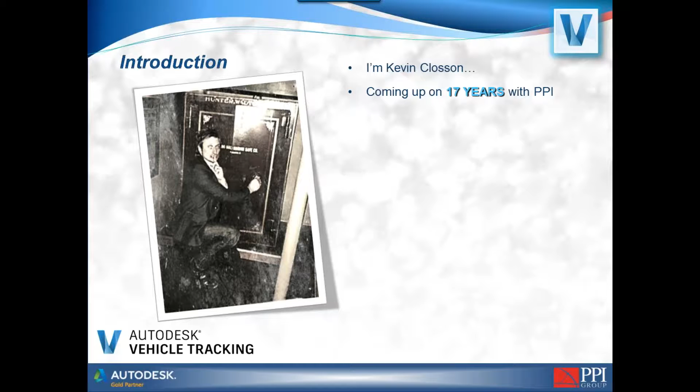Again, I'm Kevin Closson, and this part freaks me out a little bit - come September it will be my 17th year here at PPI Group. And I started when I was 10, you know. Well, I was going to say, I didn't think you were that old. Yeah, that's me, and by the way, that's a picture of when Wendy and I were in Chicago learning all this fancy new 2017 software.

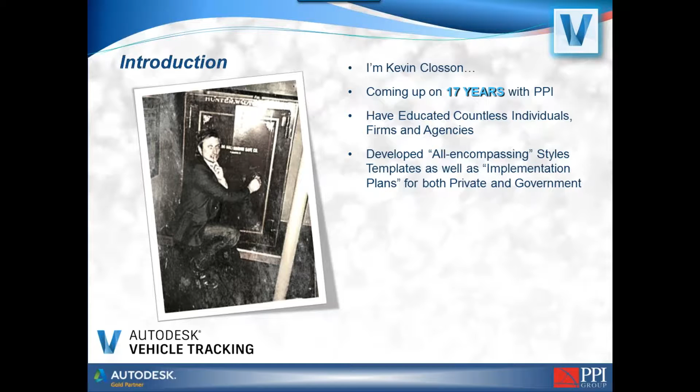I've been out there quite a bit, traveling all the time. My role has changed quite a few times throughout the years. I do a little bit of tech support here and there, a lot of the training, a bulk of the custom training. My focus now is more on going in, taking a look at people's processes, figuring out how we can streamline the template for them, and just make Civil 3D work better for them, more efficient and so forth.

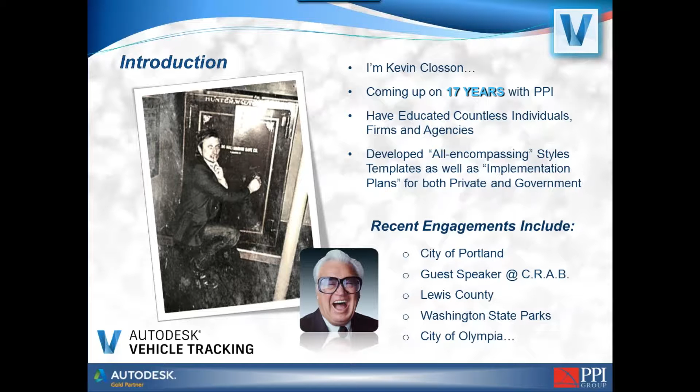In fact, I just came back from Olympia, so I heard a couple of the folks up there were going to be watching, so I can't see you, honestly, but I hope you're doing well, and I have a chat with them a little bit later. And this is for absolutely no reason, I just like Harry Caray, and I love the picture.

And then hopefully one way or another we'll try to squeeze out a little bit of fun out of this. For me, I do these little things for me - I should have had like a little contest, tell everybody to remember the names, movies, right, things like that. We could have got the most, we could have had a prize and everything. Well, we could start now - I got a ton of prizes.

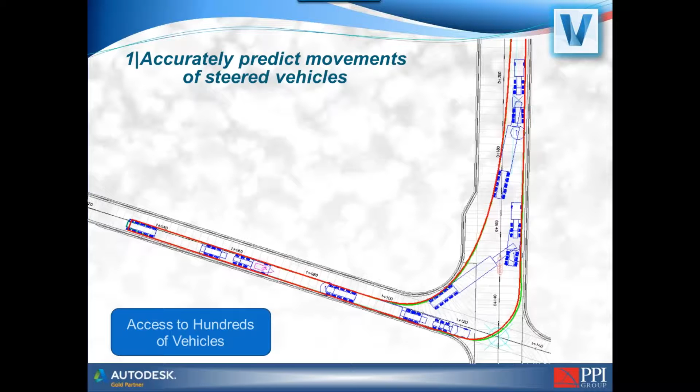Speaking of predicting vehicle movements, once you install the program, I believe it's roughly 1,500 different vehicles that come with it. You also have access, depending on your contract with Autodesk, to roughly 600 more vehicles that you can download and install onto the system as well.

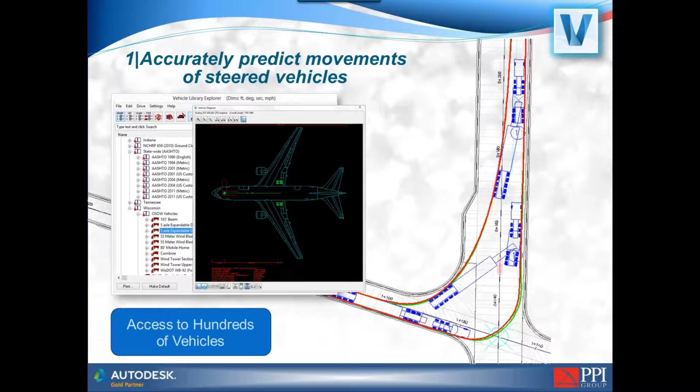Taking a quick peek here, you can see this is a Boeing, 747 or 737, whatever it is. Then a little tough to see due to the color, but there's a semi. You can view these in different views - darn near any vehicle you can possibly think of, light rail, everything is in this thing.

The beauty of it here - and if my friends up north are seeing this, this is one that was given to me a while back - this is just a cut sheet. You can customize anything you want. It's very, very easy to customize, and I actually added a little bit more just to show that off.

Due to its size you can see it a little better here, but you can see all my chicken scratch on there - I have to find the wheelbase and different measurements. There are no actual standards to this, so just to forewarn you, if you download a sheet from wherever it's at, usually from a vendor selling the vehicle, they'll have all these specs, and you'll probably have to do some simple math to boil it down.

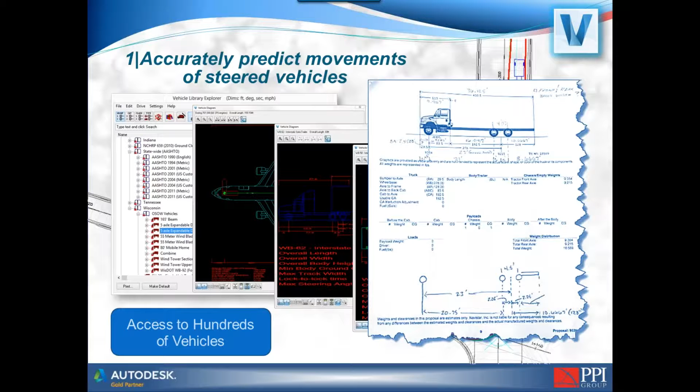But I added this one in here just to give you a feel for it. So if I were to take this one, the program comes with a wizard that allows you to - well for starters, you'd actually go find something that's relatively close. Once you've found something close, you can pull it up in the wizard, or you can even start from scratch. I usually try to find something close.

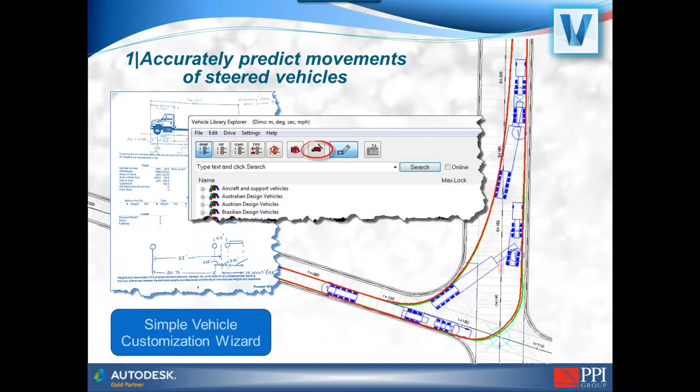It'll bounce you through - you can see this is one of many, there's a button right here that says next. Once you've set the wheelbase or whatever it is, your axles and so on, it just keeps jumping you through one after another.

Last week, when I was working with some folks up north, we had a very simple sheet - I think there were only 4 settings, so that's all there was. But on these more complex ones that have vehicle heights, mirrors, multiple hinge points, anything you can think of, all of that can be brought in and easily customized.

In a nutshell, what you basically do - hopefully you can see my cursor - it starts off with a library. It comes with an extensive library, as I said roughly 1,500 vehicles. You would find something close. Underneath that, there's what we call groups, which is just a grouping of vehicles. Then you have the actual vehicles themselves, and from there, each vehicle's individual spec.

I say all that, and I know you're not seeing it here, but I say it because this can then be saved in that drawing - it'll always remain in that drawing. So if I were to send this to somebody, they'd see it.

But if you did take the time and go through the process of customizing these vehicles, you can save that information back into your own group or library. The idea is, right out of the box, you cannot adjust the actual vehicles that come with it. Those are standard - you don't touch them because you don't want to mess anything up. So you grab one, you copy it, then you start that wizard.

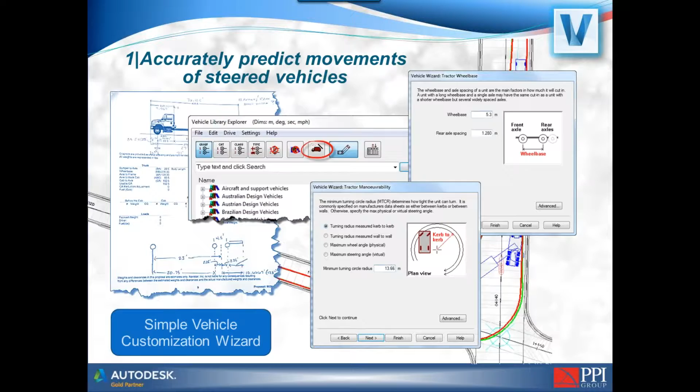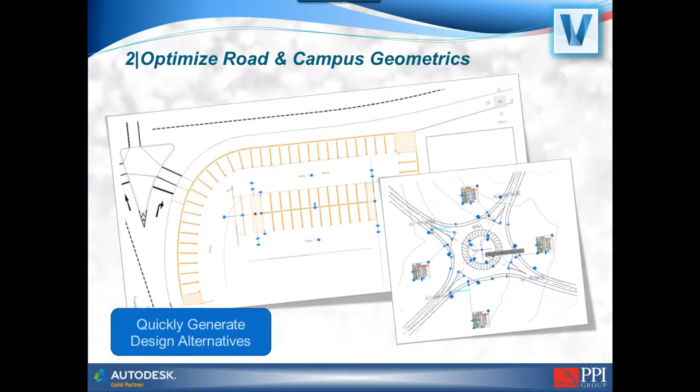Of course, all of those standards can be copied and customized to your exact needs. And on top of that, you can perform real-time analysis both in 2D and in 3D.

Once you lay that information in, we'll see here in a little bit - the vehicle draws, you can see the chassis, you can see the wheelbase, the envelope of the vehicle itself, how it's making it around corners. So that would be in 2D.

Then you can even run a three-dimensional evaluation to see if you're making it through an intersection, or if you're running a low boy or something like that - is it going to be accidentally milling the system or milling the road, working against you?

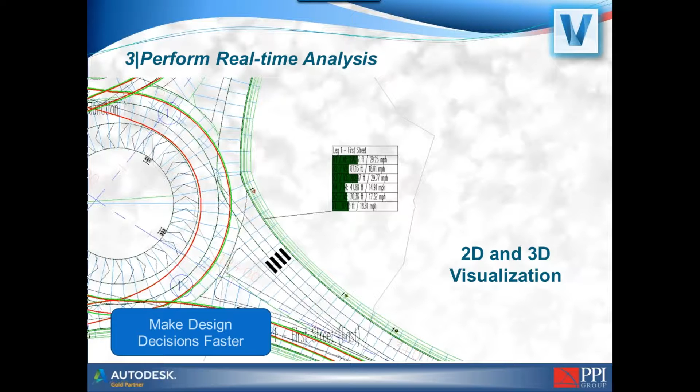And the other thing you can see up there, that's a roundabout. On the right there - I'll throw something together so you can see how easy it is to create these things - that's what they call a HUD, that little chart. We're getting real-time analysis where I start moving things around, and we'll see it here in a little bit, where it'll show different colors if you're staying within guidelines and meeting certain design standards.

So anywho, let's get weird here. We're going to start off - a big part of this presentation, where it originated, was we wanted to show different uses for vehicle tracking. It's not just the standard, let's drive a car, let's see if we can get this truck around the corner. Obviously that's what a bulk of our work will be, but there's a ton of different uses out there.

In fact, Wendy and I, when we were back east, we were seeing all of these neat workflows, and it excited us - we thought it was slick. So we wanted to show some of this stuff off. I have three different ones here. I may talk about a little bit more, and if anybody has questions on any of them, feel free.

But the first one we'll be looking at is like a forklift. Next one will be an airport with a baggage claim. And then a hospital - and I forgot, I left that in there. Sorry, Wendy, goofing off - it's your little scooter there.

You promised you wouldn't tell anybody about my little scooter. Well, it's very cool - she's got flames on it and everything else.

It's very nice. And in that hospital also, we'll take a look at what's referred to as a gurney - I'll show that off here in just a second.

So starting this thing up here, we're starting off by looking at this forklift, and right there is the library - it's kind of small, but the vehicle that was selected was an interstate semi, very similar to AutoTurn. You just start drawing this in and proceed, and there's some great tools built into this where you can see where they're starting to make that turnout, and what I just selected there was pick alignment.

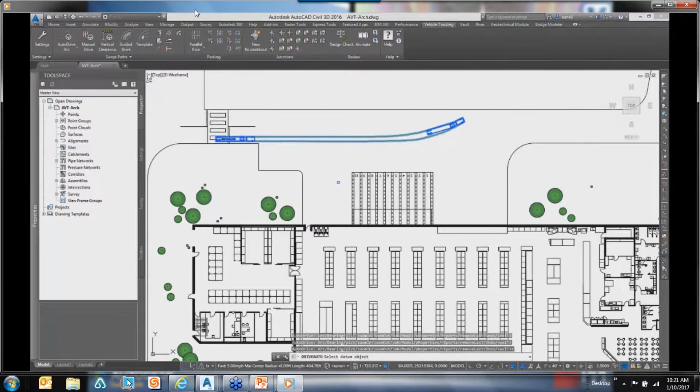I can select that line, and what that's going to do is orient it to any line. Even though it says alignment, it's not truthfully a true alignment - it could be a polyline, a box, whatever it may be. And you can see where that's backing up. That's sort of the traditional vehicle use that everybody, for the most part, uses - the 2D.

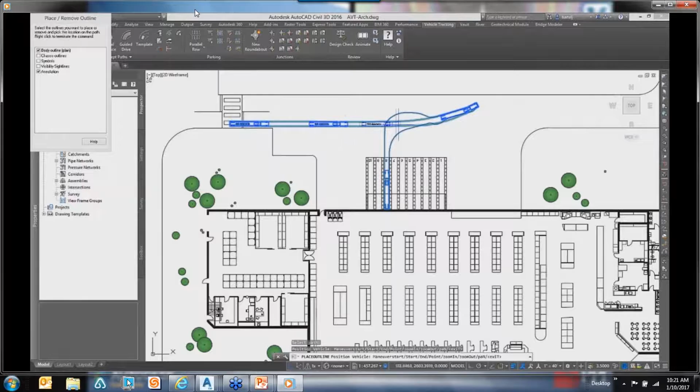Now what's going on here is called placing an outline, so you can further recognize this. And that just draws that vehicle in a still shot there.

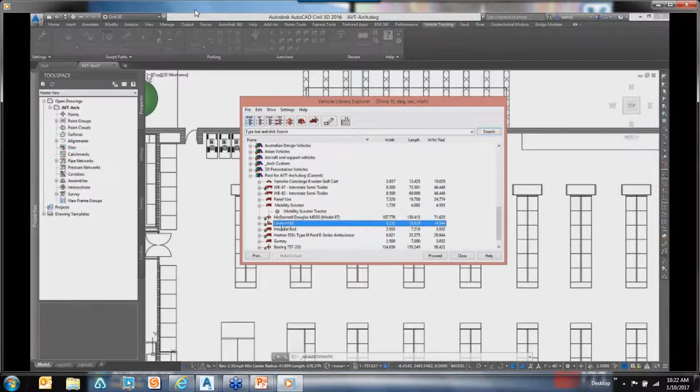Very nice. Now we're going to go inside the building, and I may speed up some of this so I don't bore you to tears. The next move is actually going out and grabbing a forklift. These forklifts, just like any other vehicle in this program, you can take and change its turning radius, make it yours basically. Just get the specs, find something relatively close, and we can go right in and change that up. So I'm going to place that inside the building, and I'm proceeding here.

I've just started with orienting the forklift, and you can see where I can slide this up and down, using a 90-degree angle there. That would be going into the truck. Again, picking an alignment so it'll orient to that line as it's backing up. This could be something like a Costco or some kind of warehouse. Will we be able to make it around that corner? Notice again, I'm just picking alignments, so this makes it so much easier. Now, by the way, I could be just drawing this freehand.

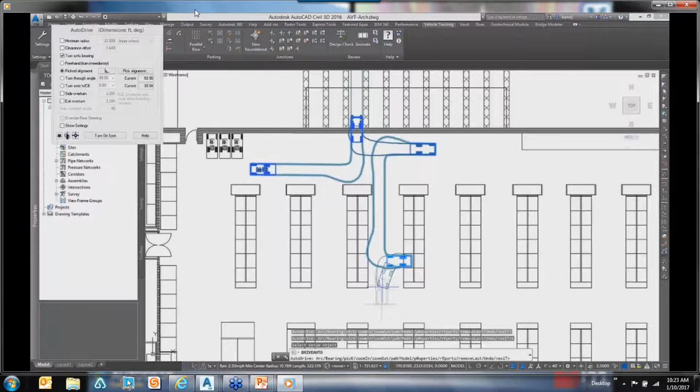It does get a little sketchy when you try to do that. No, it doesn't—it's supposed to be like that. It's just there's a lot of picks and clicks, and you can accidentally mess things up, and I'll show you here in a little bit.

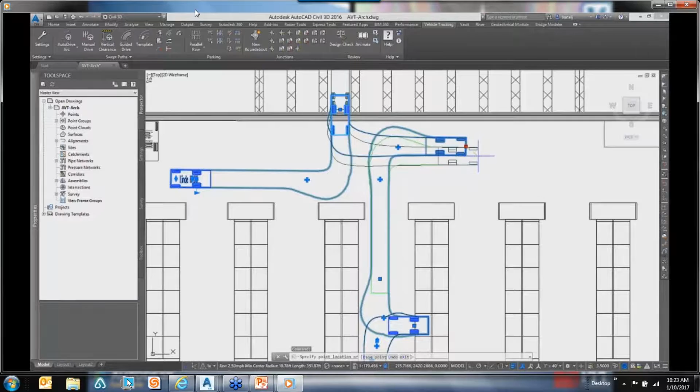So there, the whole concept is I'm just working with these extra little grips. I can grab these, move it around. You can see where we're looking at the envelope there, exactly what's happening. Just further refining, making sure that this vehicle can make all of these turns, and it looks like we're in pretty good shape. Then I could return back.

Now that is of course real-time 2D that we've been discussing. This is actually playing it, and I'm just dragging the little bar in the upper left-hand corner, or I can just hit play and it'll draw, or we can watch that vehicle make its path.

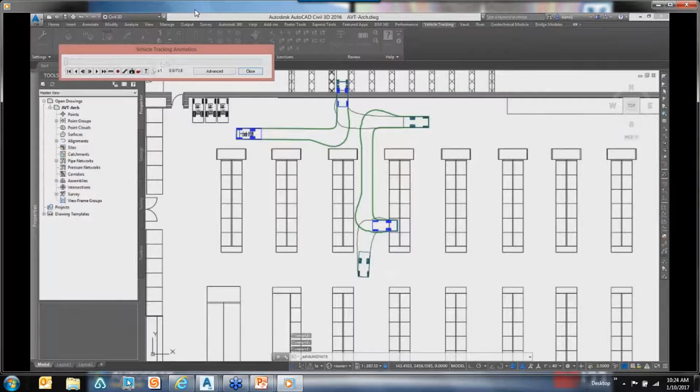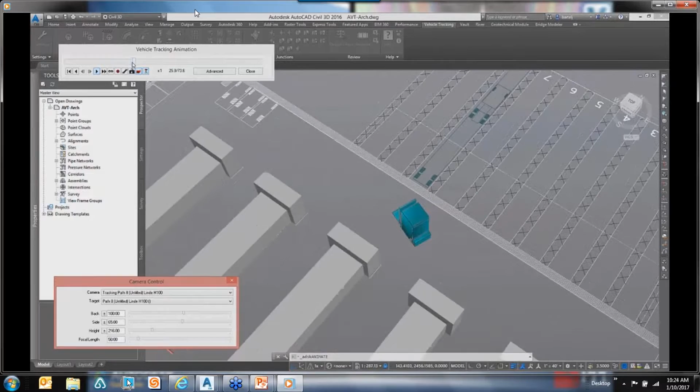Now this would be in 3D, and I spoke to a few of you personally on this. This is not magic by any means. Every time you see something like this, it has that feeling like, oh goodness, how hard is this to pull off? It's not hard at all. This same command—all we did was animate, and we threw it into a quick orbit there, so we can see it in 3D.

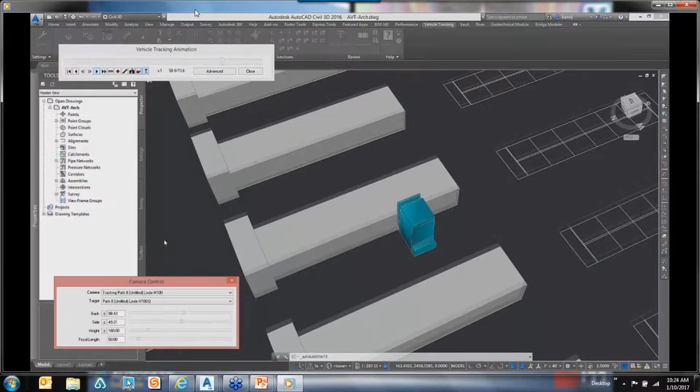And then all of those possible shelves or buildings or whatever it is, that's just a simple extrude command. Just type extrude, grab the closed polygon there, and drag it up to whatever height you need. This can also be on a road if we wanted it to, obviously, or this is just at a 0 elevation, or for that matter, whatever your elevation is. All right.

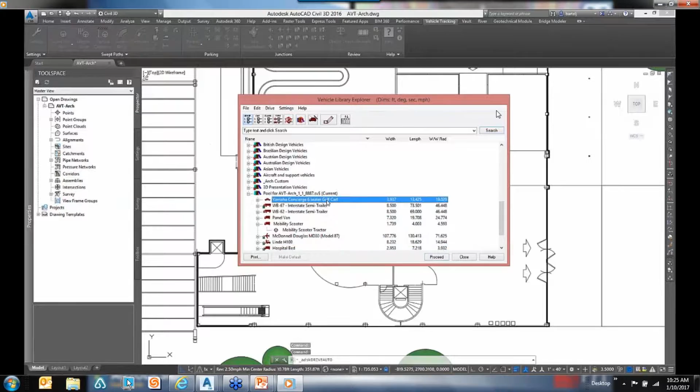Then the next one we're going to take a look at, again giving you a little bit of an outside-the-box concept here. So this one is at the airport, and over here what we're looking at is the staging area. I'm selecting a golf cart—it's a 6-person golf cart. I'm going to put it in its staging area there. This would be picking up folks that maybe aren't getting around so well at the airport.

So as they come off the plane there, we're backing up, and the whole idea is I want to see if I can get to—we're leaving customs there, and I'm trying to get to the baggage area. Can I make these turns? I'm going to try to loop around this thing.

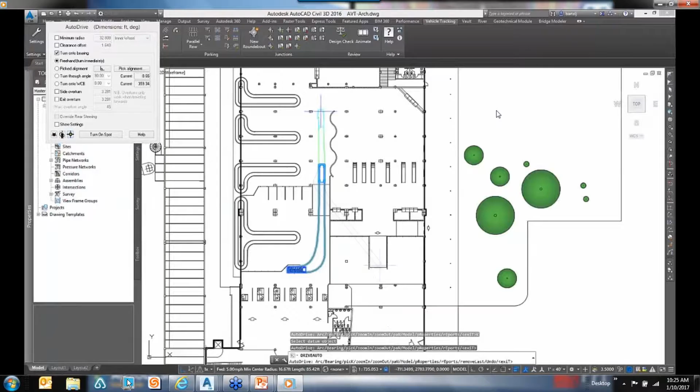Right now I'm drawing this manually. See how that's got that, as I get around there. For those of you that have dabbled with this, you know it can get a little tricky. That would be just working its way through. If I don't like it, I can keep backing up, and again, that's that real-time analysis there.

From here, we can pick another alignment. See if we can squeeze through, and we're trying to work our way out to the exit.

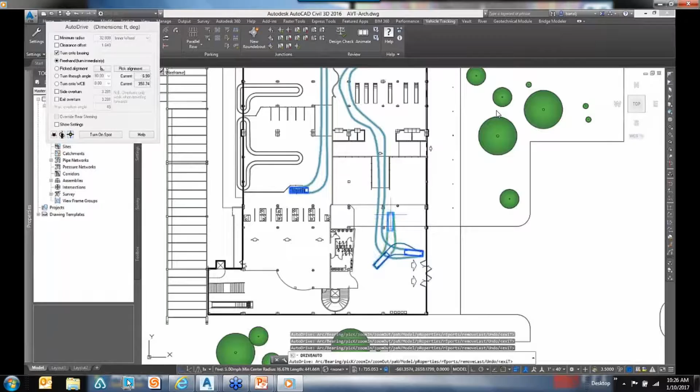And then that would be the drop off to the exit, and they could back up and get back into that staging area. So this has helped out a lot of folks on the architectural side, obviously, where are their designs going to work? Is the equipment that they're putting inside the buildings placed correctly?

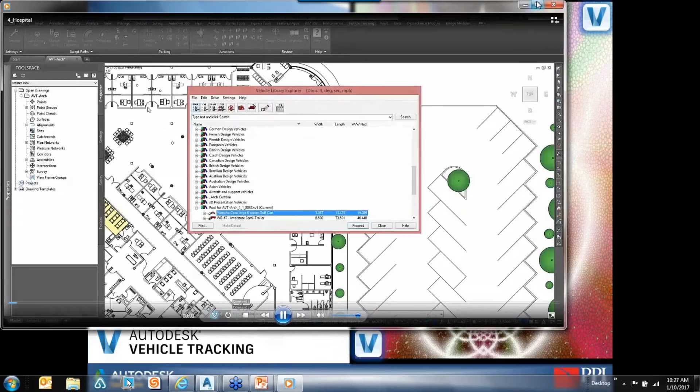And the one I really like is this hospital one. I thought this was kind of slick. Starting off with this, this is the mobility scooter, and this is just one of the scooters that comes with the program. Again, you can customize it to whatever your needs are. This would be if a visitor came to the hospital and needed to get down to any one of the doctor's offices, working their way through.

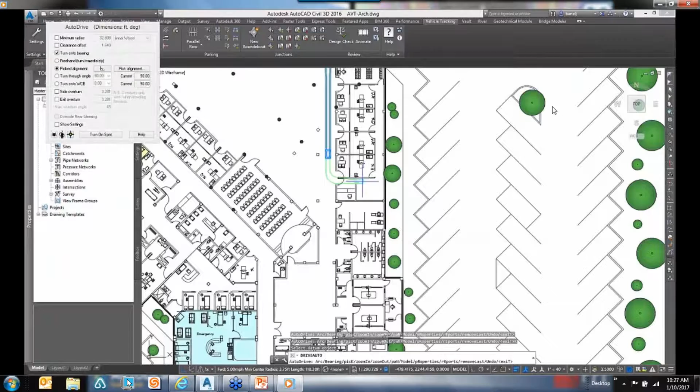Just picking another alignment here, taking it around that corner. Now coming from the west, you can see where it makes that corner, there's plenty of room, so getting into any of those buildings wouldn't be a problem. But once we got around on the east side, if we were trying to turn into one of these buildings, that's where it's going to get pretty tight. So we'd have to figure out a possible alternate design at that stage.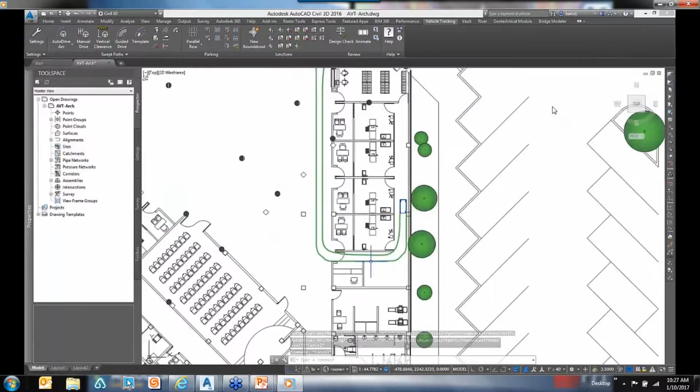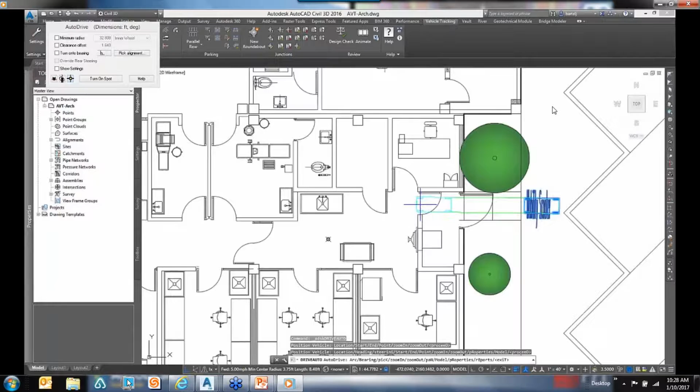Going down to the south end of this building, I'm going to do the same thing, drawing using that same scooter. In this case, this is from a west access, and this might be one of the employees. Same idea, you just proceed along - zooming in here a bit. We're getting by that wall, kind of squeeze around the corner there. Just following these alignments, and then right out through the door there. So that wouldn't be a problem, that shows we'd be in pretty good shape.

So down here, we're looking at an ambulance, and of course it would start with a vehicle. When the ambulance pulls up, can it make all those turns? Yeah, check, we're good there.

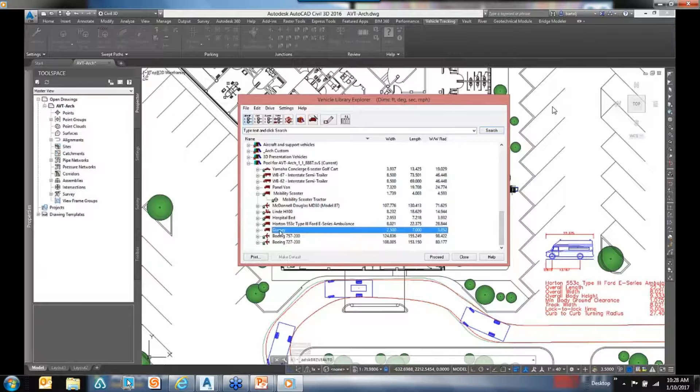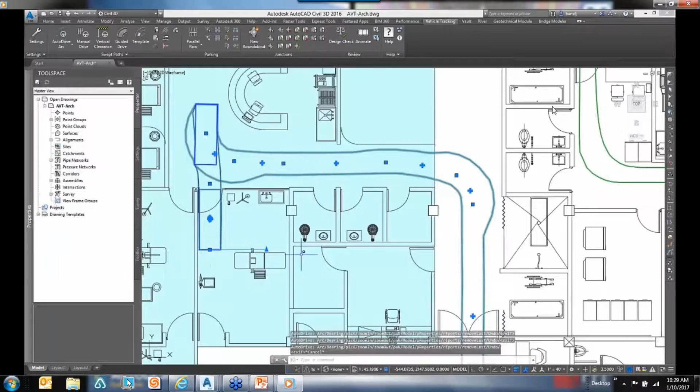And then notice there's a hospital bed, here's the gurney, and once you place it, you orient it. So this would be coming out of that ambulance bay, and where we're trying to go is to the emergency room possibly. So it's not too bad, kind of tight going around that corner, but here's where it gets a little sketchy. It looks like it's making it, but it is tight. So we can get it in there now, if all works out - or I'd say that we'd be okay on that.

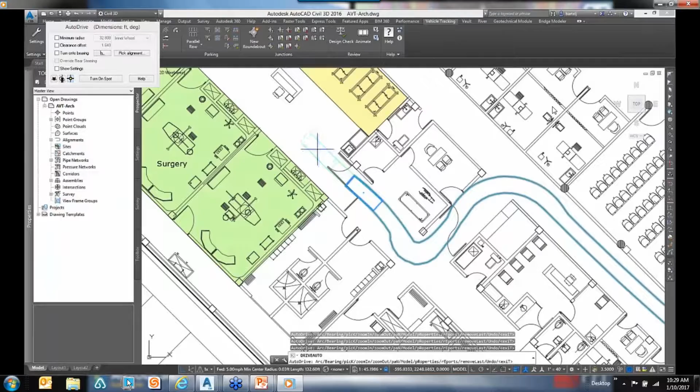Now up here, we're going to be looking at if we needed to get to the surgery room. So coming from that same location and working our way around the corner, trying to get into one of these surgery rooms, and that's real tight there. And trying to line that up against one of the beds, so that's pretty tight. I hope we're not in a hurry.

Well, it depends, it depends. I hope it's not me on the gurney. No, I'm on the scooter. I'd be smashing into walls if you're on it.

So just different ideas. Now, I shared this last week with a few folks, if they happen to be listening.

One of my favorite ones I saw was back east when they were showing these new tools off for us. My favorite was the great big - what do they call those, like the Titanic, the great big ships - I can't think of the name. Cruise ships, cruise ship. So these things are getting bigger and bigger. Where they take off out of Florida, they're getting so large they can't get these things turned around. As it's coming into these docking locations, they have a lot of different boats and tugs to get these things oriented. Can it make the big turns? That was probably one of the neater out-of-the-box uses for this program that I've seen.

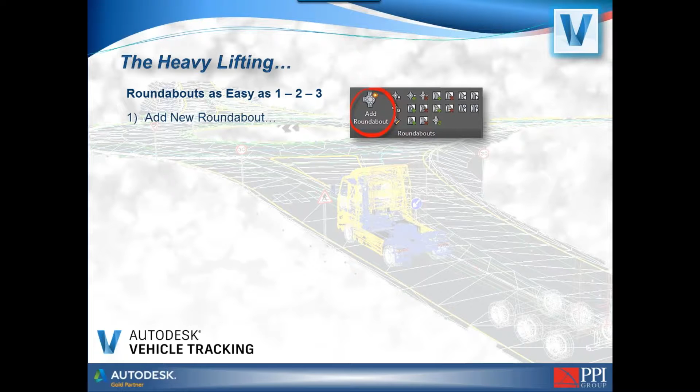Surely not hard, but as it gets laid in, it uses true design standards. So you're not just drawing lines, arcs, and circles. Now, is it what you need? Well, it'll probably be close.

When we were at the CRAB conference, we talked to quite a few folks on this subject matter, and you know where it'll get you to as far as just laying this in. I'll throw it in, and you'll see it here in just a second. But it's amazing how quick and how much of the design you can get done almost immediately. And as far as a corridor being created, from there we're still going to have to go through and make edits and all of that. But just that initial layout is mind-boggling how much faster it is.

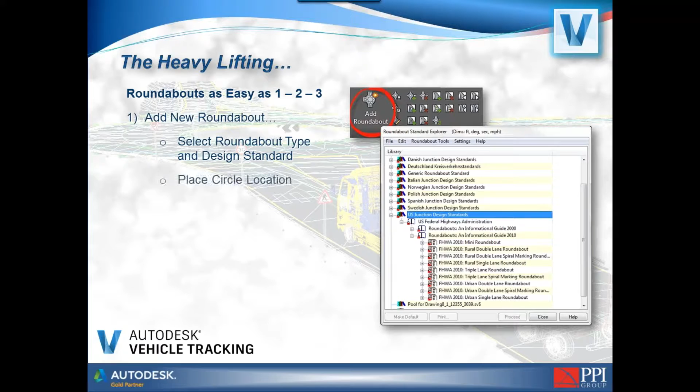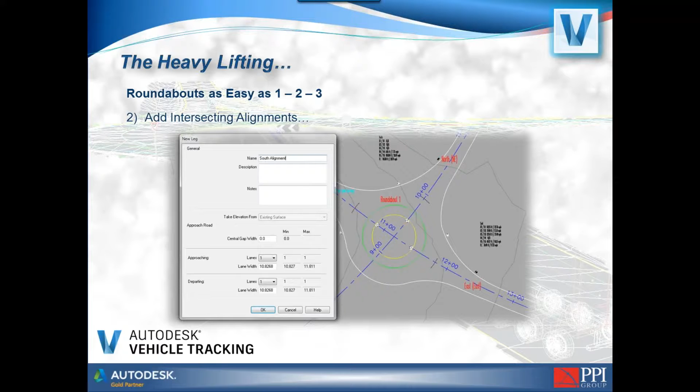So the process is kind of jumping you through the steps, and I'll show you here in just a second. You add a new roundabout, you select your design standard - what is it - and you place your location, which is often referred to as a circle location. Then the second part is you add in your intersecting alignments, or what are often referred to as legs. You can see in this one I created 3 of them up to that point. Everything again is adhering to standards there. And then the final part is the edit and refine stage.

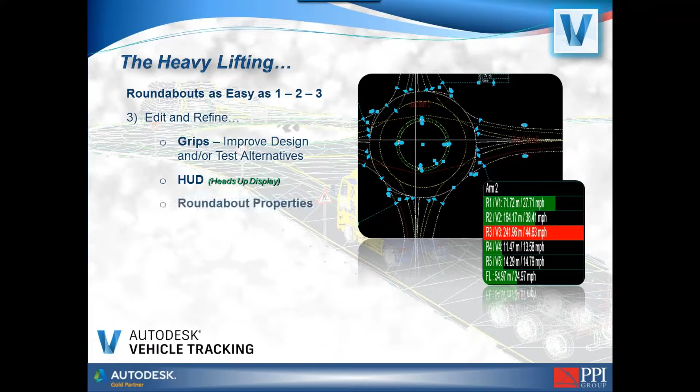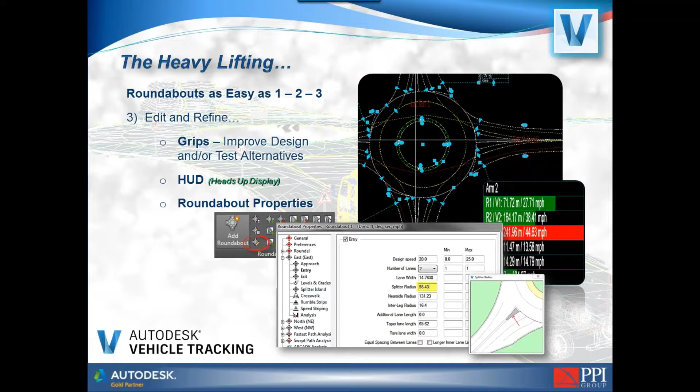And then after it's all said and done, probably one of the better parts of this is you can actually go into the properties of this, and it has an excellent interface that allows you to bounce back and forth and clean everything up right there. You'll see that - I'll show it in just a moment here. So in fact, let's bounce out to it.

All right, so what we're looking at here is just a couple of alignments. This is real simple - this is just a drawing from Autodesk, and there's not a lot to it. A couple of different alignments here. For those of you that have been using the program, or for those of you that are inexperienced with it, just remember everything comes down to setting up something first, like selecting a standard or selecting a vehicle, and then you perform whatever task needs to be done.

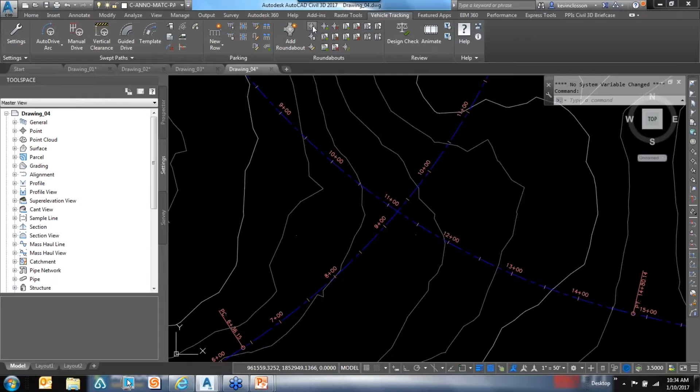In this case, I'm going to go into the Roundabout standard. It's like a library or explorer here. This may be a rural single lane roundabout. Just looking at these, I'll give you a second to poke through them. Okay, there's double lanes, all kinds of stuff.

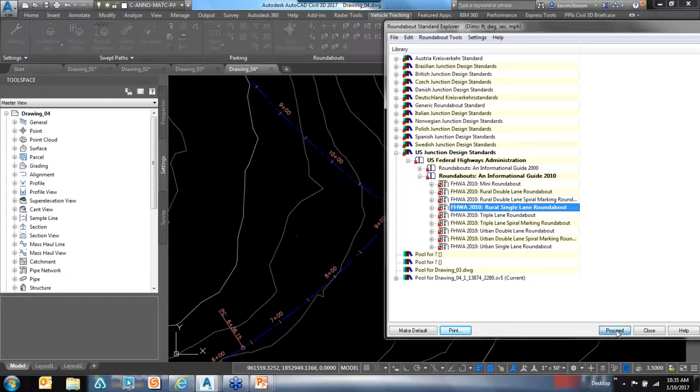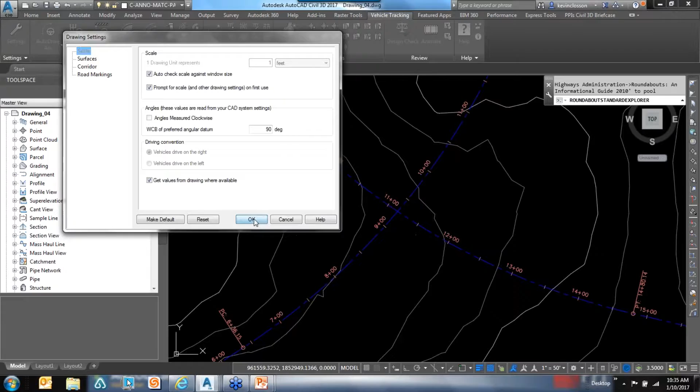But I'll select that and proceed along here. As I'm looking here, it'll automatically pull my scale for me, if there's surfaces I'm tapping into. I'm not going to draw any corridors in yet, but I can very easily, after it's all said and done, go right into this and say okay, create a corridor from it. So I'm going to go ahead and say okay to this, and here's where it's checking my drawing for scales, and it'll give me my roundabout. I can name this thing, and I'll say okay, and there's my circle, and wherever I want to place it, I'll just pop it in somewhere close.

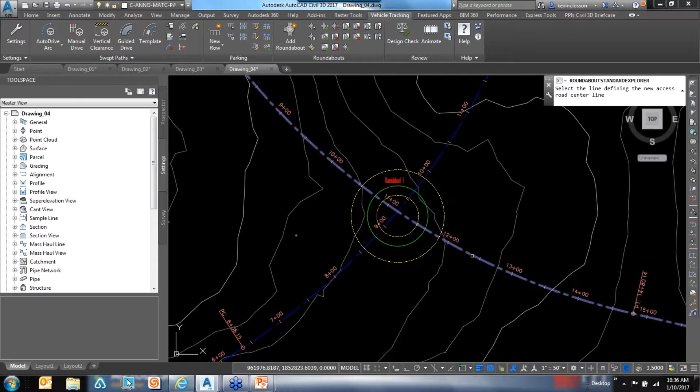It's telling me okay, select a line defining the new access. Here's where you just basically work through one at a time. I'll say this is my incoming here, so I'll select that, check. I can name it if I wanted to, say this is the east arm or something like that, and I'll just say okay. You can see how that's starting to draw in, and I can just work my way around it. There's the next one - I'm just doing this for speed here, kind of bouncing through. Third one there.

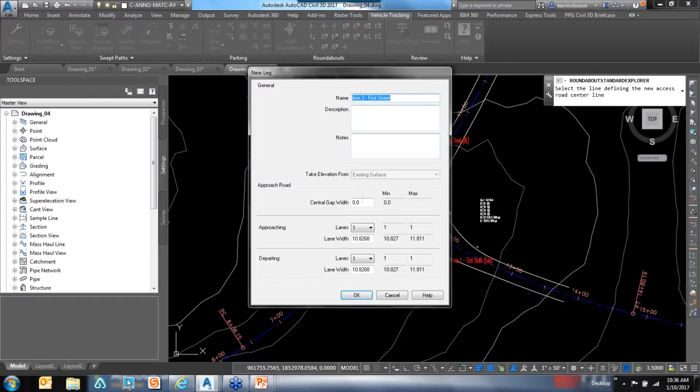And then if I wanted to get real fancy, I'll make it all 4 directions. I'll say okay to this. And if I hit enter, you can see now all of these grips that are showing up on the screen.

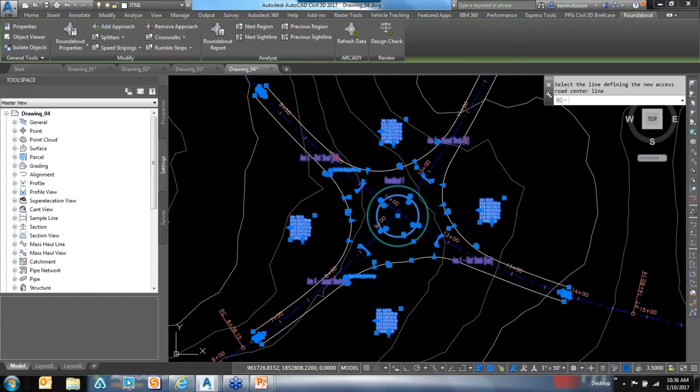Now if I zoom in a bit, there's those charts that we were talking about. This is the part that always got me, the ooh and ah part, where all of this is dynamically linked. If I were to grab that center point, you can see I can move this whole thing around.

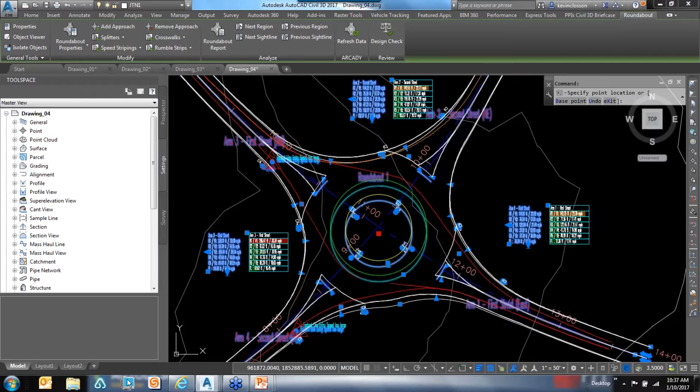I'm trying to go slow so it's updating on your screens back in your offices and home and wherever you're at. Worth noting that all of these numbers again are updating. If I zoom in a little bit, you can see those different colors I was talking about. If I really take this out, and go too far, it just says nope, can't do it.

So with all of this, I can pick my corridor, or roundabout—it's not a corridor yet—and it depends on what we need to do with this. If I want to edit this, I'll show some real quick functionality of how user-friendly it is. So I'll go into my... whoops. I'll select that, and go right into the roundabout properties.

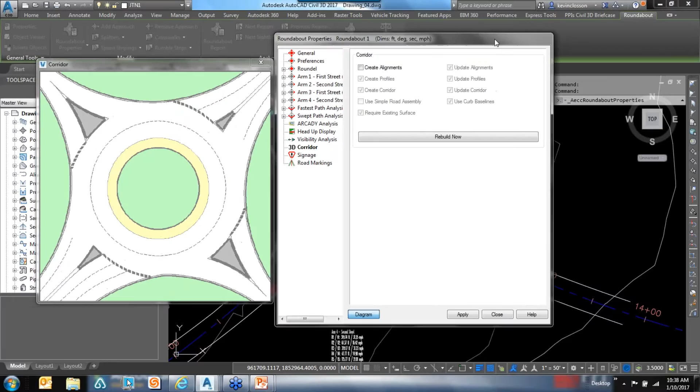And as we look at this—oh boy, let's see if I can get that back over. There we go. Here's our different arms: 1, 2, 3, 4. Again, I didn't name them, but if I were to expand it out...

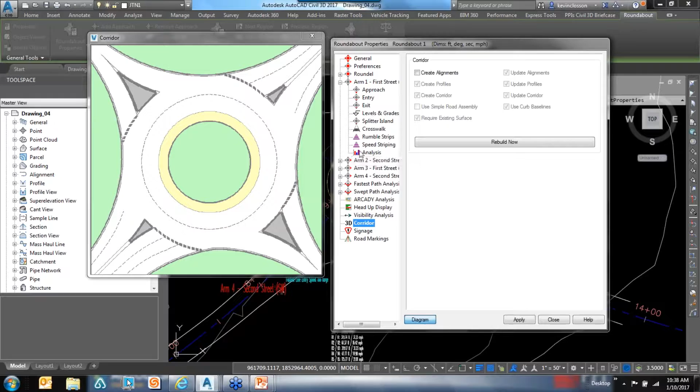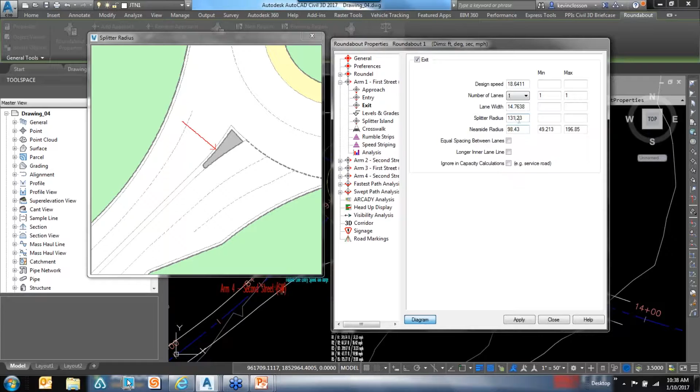This is all of the information on the inside of it, or underneath it. So if I go into, say, the approach, it'll show me exactly where I'm at, and with the numbers, once we start highlighting it, you can see exactly what we're talking about. There's the exit, same idea, and so forth. Excellent. If I like it, I'll just close this for a moment.

You also have a whole series of things we can add to it, like signage. All of this is happening on the fly. Do I want to add in crosswalks? And you see where those crosswalks would be laying in, also with the signage.

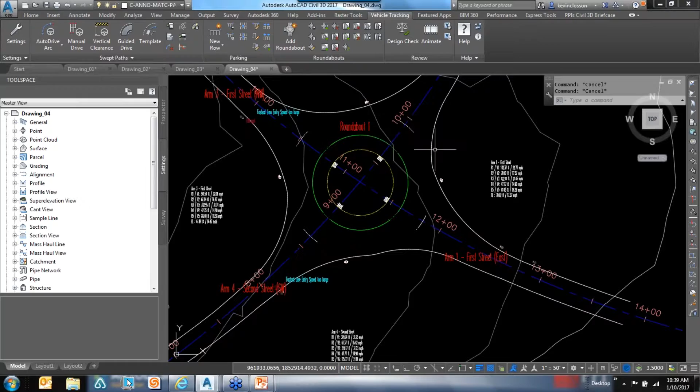And then finally, I'm kind of up against time here, but if I wanted to throw in something, or I wanted to create a corridor, so we can select it. There is a little bit of tricks with this—get a hold of me if you ran into a snag or two on this. I'll make sure my email's up at the end of it.

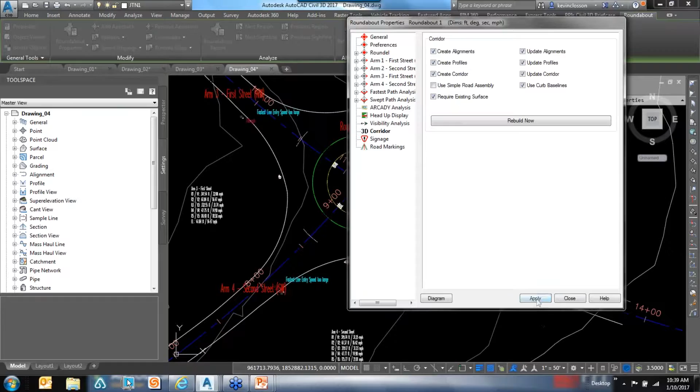But when I am satisfied, I can close this down, go right back into the properties and locate the corridor, and I'll just say create all my alignments and everything else that's going to work with it. And when I hit apply, you'll see in the bottom right there, it's going to grind away thinking about it.

Boy, you should see Wendy's face. Just amazed. Just amazed. Okay, and I'll close this down.

Now, I just did this simple—I realize I'm not trying to overstate this by any means. This may or may not be what you're looking for, but this is where you would have to go in and start making whatever edits or whatever it may be that you need. Surfaces can be built from this.

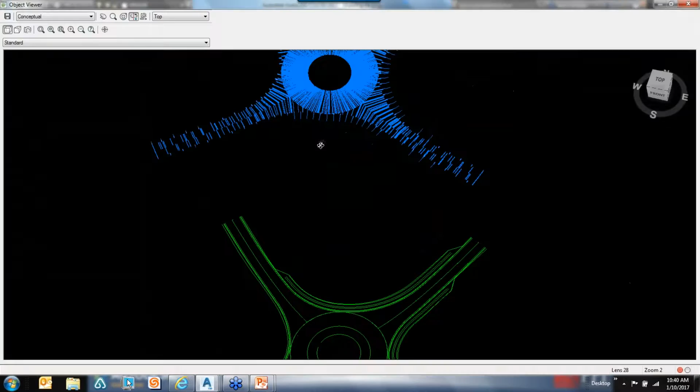So if I just grab this—and it's always kind of the dangerous part here—let me take it into object viewer. Rotate that back maybe. Yeah, it slowed down quite a bit. But there you can see that that is a true three-dimensional corridor.

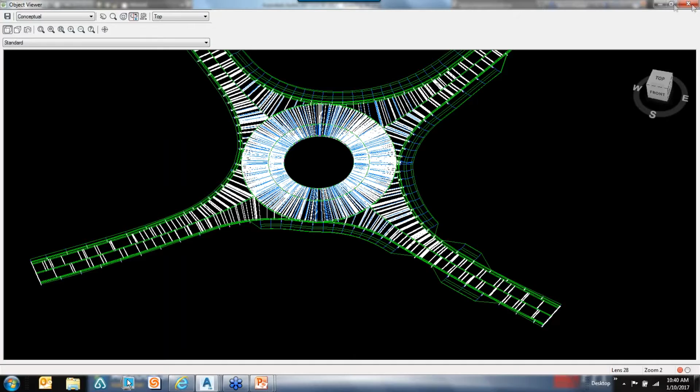I'm moving a little slow on me, so I'm going to get out of this before major problems arise. Okay, now, well, shoot, I can't help it—that technical side comes out of me. If you do build a surface from this, you may get a little bit of a bumpy ride if you look at the actual surface after it's all said and done. Just remember that, in fact, everyone's got to walk away with something here.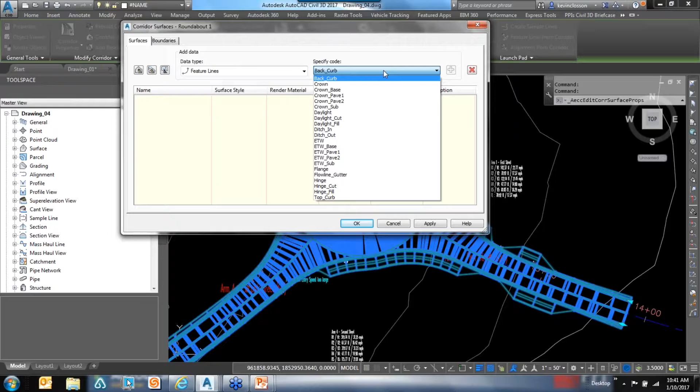So real quick, in the corridor surfaces, when you go to build it, don't just build it from your links—build it from the feature lines as well. This is just a little trick that adds actual break lines to this thing. So if there's any edge of pavement that's going up and down just due to triangulation, there's a lot happening in this thing back here. There's a little tip for you.

There's the tip of the day. Ding, we need a little bell. Wow, next time we'll get a bell. I got a bell in my office here.

So, all right. And then let's see, maybe something else here. We were talking 2D, 3D. Obviously, I can lay vehicles in on this. I can drive it.

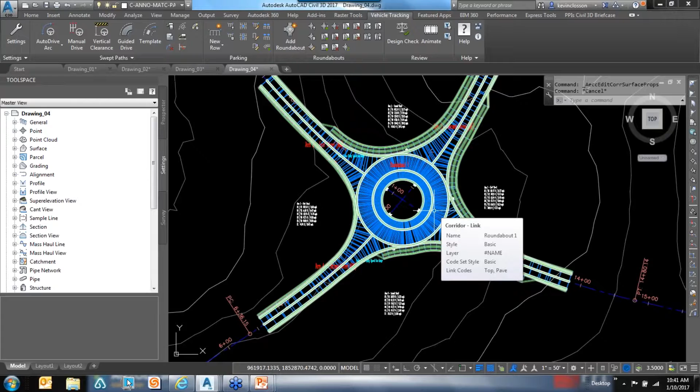But I did show this off the other day, and this might be worth a real quick peek. One advantage of this program over some of its competitors is it does have the 3D capabilities.

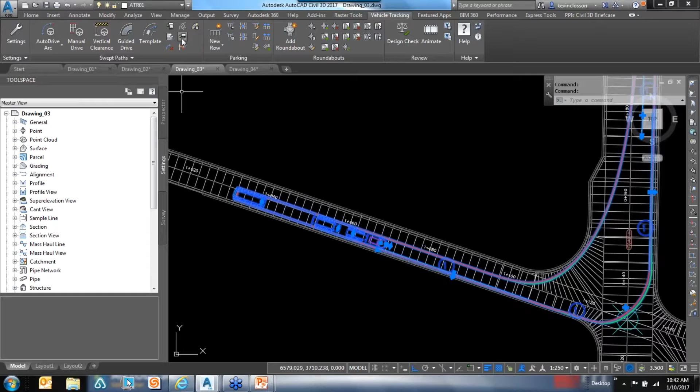So we can actually run a quick report on this, and what we're looking at, this is just a low boy. So if I were to pick this thing, I'll just insert a quick profile of it, and this just goes directly into your drawing.

You can get a little feel for what we're looking at there, and I'll leave it highlighted, otherwise you won't see it so well. But there's a couple of hinge points. I think the ground clearance is quite low, like a half foot or something like that.

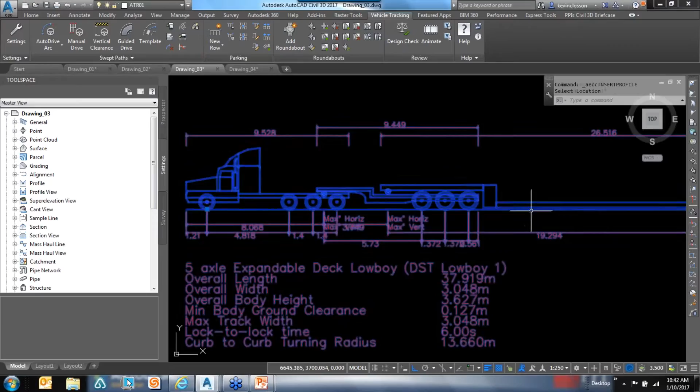This is just the default one. Again, all of these can be modified. So then what we're looking at, here it is here, and they've already drawn it around this thing.

Now, if we wanted more visuals of it, of course, I can select it here, and maybe we just want to get a little bit better feel for how it's making around that turn.

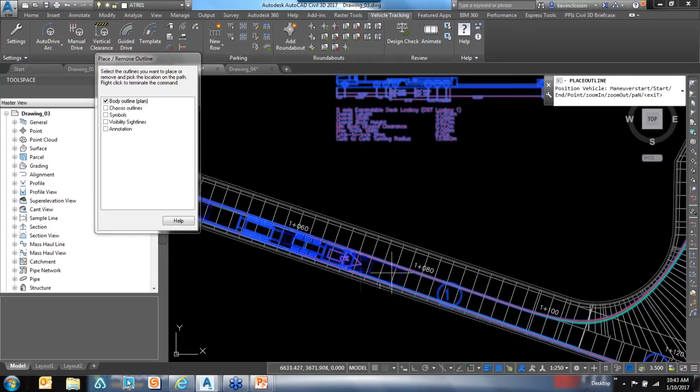So I'm going to place an outline, and I can set all different kinds of things on or off, whatever it is that I want to see. Hopefully you can see that I'll drag that around and I'll highlight it after the fact.

But as it's coming around this, and I know it's kind of dark there, I'll place something roughly here, maybe something up here. I'll just get out of it, and by leaving it highlighted you'll see it a bit better.

So what I'm looking for in this is not just can it make it around the corner. Now it looks really tight, but it looks like it can in fact get around this corner. Of course we have to stop some traffic and whatnot, but looking at it a bit further...

What's going to happen when the wheels are at the low point over here, and once this gets a little further up, and the wheels by the cab are also in the low point by the edge of pavement.

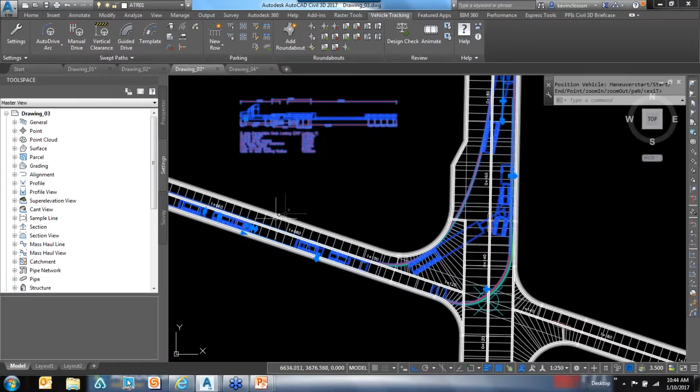And so we can run a vertical calculation. This is a surface, that's that corridor. There is elevation information there. So just by simply checking for a ground conflict, it's going to check all of our axles and whatever else.

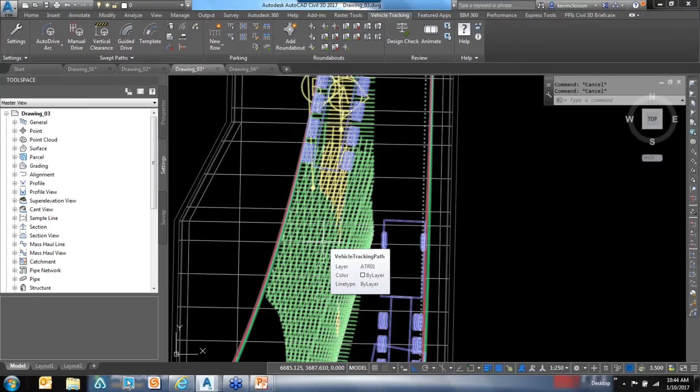And after it's all said and done here, you can see what it does is it lays in hatches where in fact it would be intersecting, where we'd be inadvertently milling the center line there. So that would be a problem. We'd have to figure out an alternate route or different vehicle or whatever it may be.

That clearly isn't going to make it around that corner. So, all right, moving on here, I'm going to get back into my PowerPoint and I'll open it up for questions here in just a minute or two. So kind of finishing off that whole concept of heavy lifting.

And where this program fits in the Autodesk ecosystem is another product that I've been showing off a lot lately in classes here and there, the InfraWorks 360. InfraWorks is a great program, excellent preliminary tool for laying out quickly, very very quickly, and aggregating data, basically a preliminary design.

So you can pull this up in a certain area, draw some roads in, whatever it may be. And then if you have an intersection and you're looking at it and you're thinking, we need to possibly put in a roundabout for traffic flow or whatever it may be.

So we can pick any intersection and say, let's change this, and there's a whole series of roundabouts that you can select. So from there, once you convert that intersection into a roundabout, we can kick that information out into Civil 3D. And Civil 3D is still our hardcore calculator, that is our design tool.

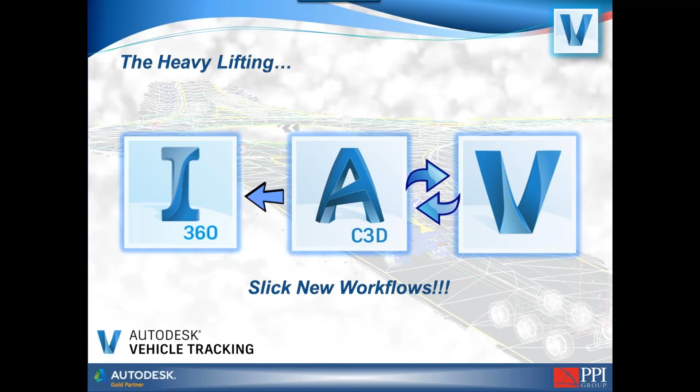We go sit down, got great seats, behind home plate, excellent seats by the way. And as we're sitting there, I kid you not, who sits dead in front of us, seat for seat? The people that took our picture. Mathematically, that cannot happen. I think that is insane. So anyway, Wendy's going, come on, Kevin. I know, that really impressed you, and me, I'm just like, okay. Do you know what the odds of that are though? Well, I know, but my brain doesn't think in numbers and maths and data. It's not easy being like Rain Man all the time. I'm just like, oh cool, that's a good coincidence.